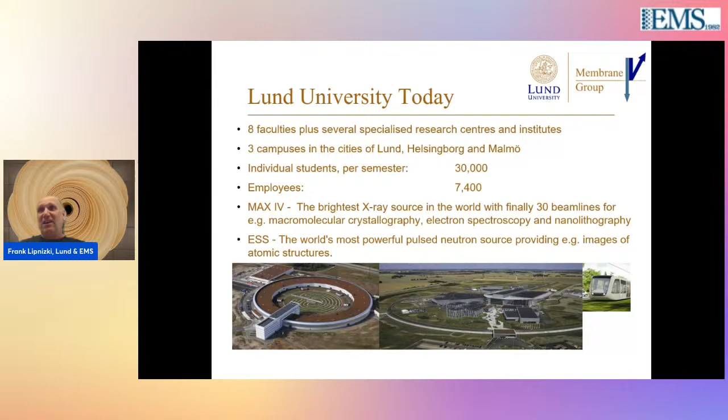One comment on the little picture in the right-hand corner: to connect these two research facilities with the center of Lund, we even got a tram line. We're probably one of the few small cities with a nice tram line running from the main train station to these research facilities through the university.

That gives us unique opportunities. We have something like 20 pilot units available for different types of membrane processes, from pressure-driven membrane processes to more advanced ones like electrodialysis, forward osmosis, and membrane distillation.

The nice thing is we are the leading membrane group here in Sweden, and the history of membranes at Lund University is over 50 years old, so it's a very established group. We do both fundamental and applied research, but our focus is really application development.

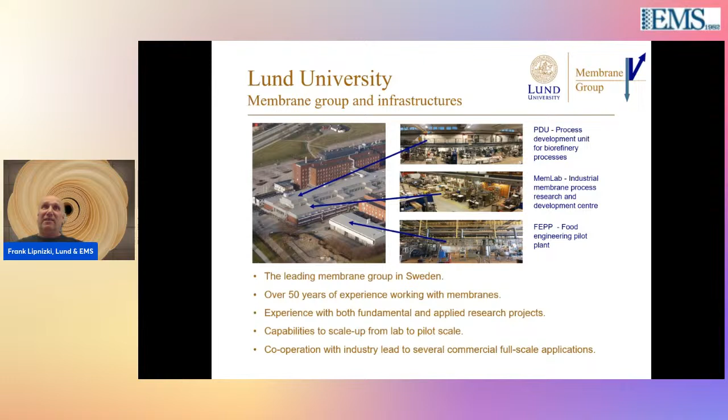We have the capability to move from lab scale to pilot scale. Most of my projects are directly related to industry, where we try to help industry validate process ideas and scale them up, hopefully ending in a full scale installation.

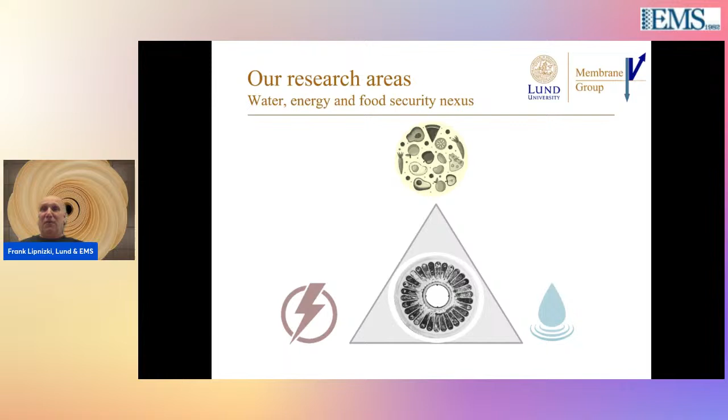To give a quick overview of my research areas, it's the water, energy, food security nexus. As you can see, in the middle there's a membrane, and the membrane is dirty. That means in all areas, membranes by nature get dirty like children, and therefore fouling and cleaning are important parameters to understand when working with membranes.

Just to give you a very brief overview of some of the applications we are working on. In the food industry, we are working a lot nowadays with vegetable proteins from underutilized byproducts, such as proteins coming from rapeseed production, hemp production, and soya milk production.

In dairy applications, we are working with byproducts. For example, we sample whey and try to utilize it even better. But also the sterile filtration of milk is an important area.

When it comes to energy, we work a lot with biorefineries, specifically here in Scandinavia, in Sweden. We have a large pulp and paper industry, and we work together with this industry. But we also look at blue energy with membrane processes, like reverse electrodialysis. And one of the areas where we started now is actually battery recycling, because we will have more and more electric cars, hopefully. And in the end, the batteries from the cars have to be recycled, and membranes can actually play an important role there.

When it comes to water, water and wastewater treatment with membranes is important. In Sweden, we have more and more installations of membrane bioreactors for wastewater treatment, but also large installations for producing drinking water, for example from surface water or groundwater. One of the areas where we are working a lot, and I'll talk about this a little bit more, is stormwater harvesting with membranes.

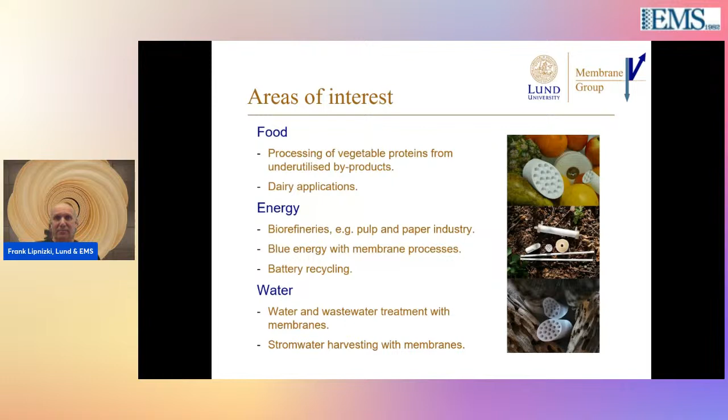This stormwater harvesting with membranes is related to the REWAISE project, a Horizon 2020 project coordinated by Aqualia in Spain. It's a huge project. We are 30 partners in 11 countries, running until 2026, with a budget of 80 million euros.

Here in Sweden, our focus is basically on three areas: rainwater harvesting and reuse, nutrient retention, and digital twin measurement of water balance. The very nice thing is we have three areas in new parts of the town of Malmö in Sweden, where we try to integrate and implement these new technologies. By showing politicians, businesses, and society that this works, we hope to have an influence on policy making, business development, and social engagement.

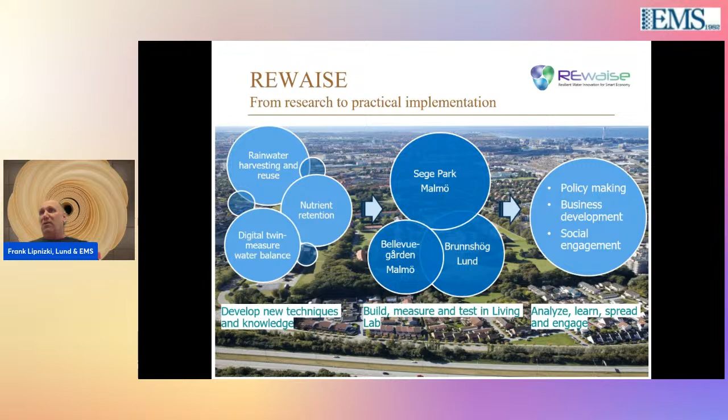So what is actually the secret behind everything? When you look at drinking water consumption in liters per person a day here in Sweden, you can see very nicely that a lot of drinking water is used for things where you might not essentially need drinking water, in particular toilet flushing and washing.

This could be two areas where you could utilize maybe good water quality, but not drinking water quality. And that was one of the ideas behind our project: can we utilize rainwater and upgrade it sufficiently that we can use it for some drinking water applications without actually producing drinking water itself?

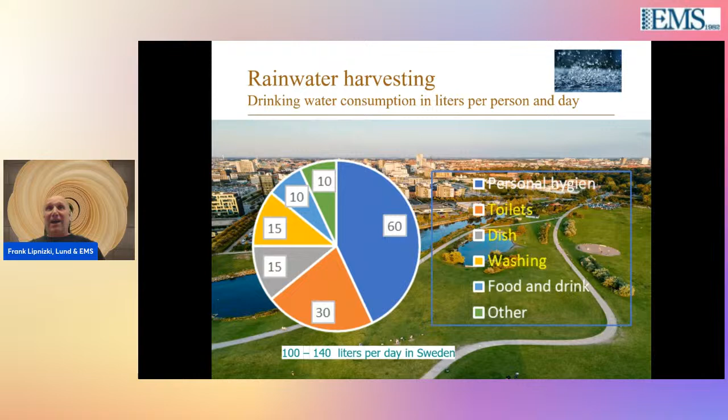The concept we came up with was to collect rain and storm water and then reuse it. One of the challenges was that rainwater and storm water can contain, for example, microplastics and micropollutants, and that's certainly something we don't want to utilize. So we really looked at opportunities: how can we do this better? And one of the solutions we came up with was membrane technology.

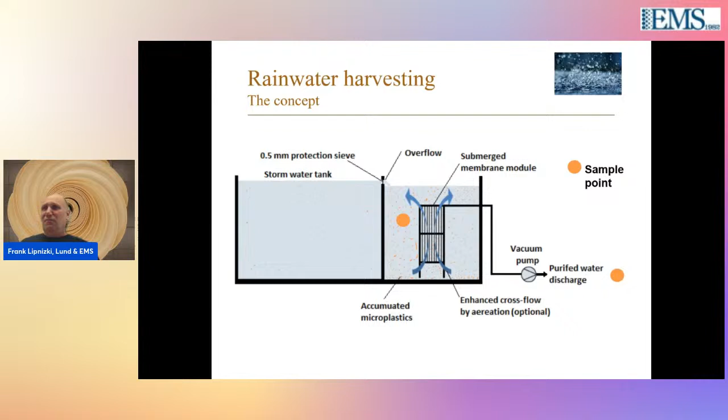That's actually the initial concept we came up with. We have the stormwater tank, with some submerged membrane modules in the tank. We have a bit of aeration to create a cross flow over the membranes, and basically a vacuum pump which takes out the purified water. That was the first sketch we drew, and we thought, that works well. We applied for the REWAISE project, and very luckily, we got the money.

And we thought it would be brilliant if we could have a nice pilot there and run it. We were very lucky because the company LiqTech, a ceramic supplier from Denmark, had a container which they were willing to lend to us. So basically we got a pilot container very fast to Lund and placed it next to this stormwater pond.

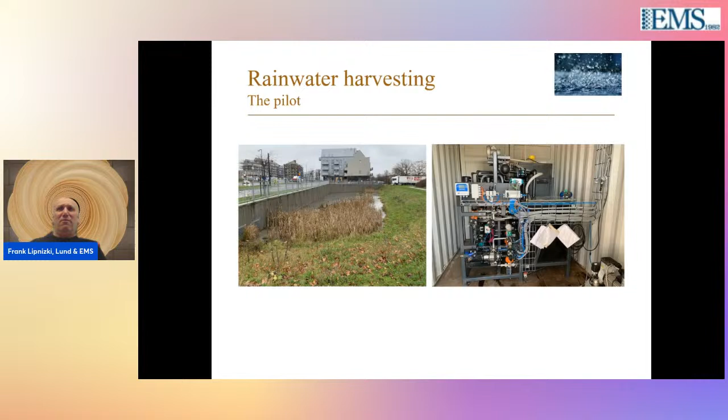We did not do too many lab scale experiments. We really jumped into the cold water and tried whether this works on pilot scale. And that shows we were very confident that our idea could actually work. And we got the first results.

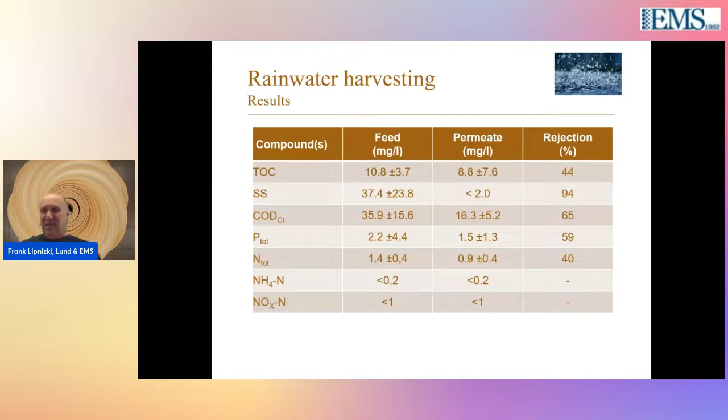And what you can see, we were quite happy about them. Total organic carbon was rejected by 44%, suspended solids by 94%, COD, phosphor, nitrogen - they were nicely rejected. So it was very nice to see what we could achieve with membranes. The membranes we used were microfiltration and ultrafiltration membranes of ceramic nature.

Interesting was also when we analyzed the permeate, we found out that we removed a lot of heavy metals. That was quite surprising because normally you would not expect microfiltration or ultrafiltration to do a great job on heavy metals. But it seems that most of the heavy metals present were actually associated to some larger compound. So we could nicely take them out and produce relatively pure water.

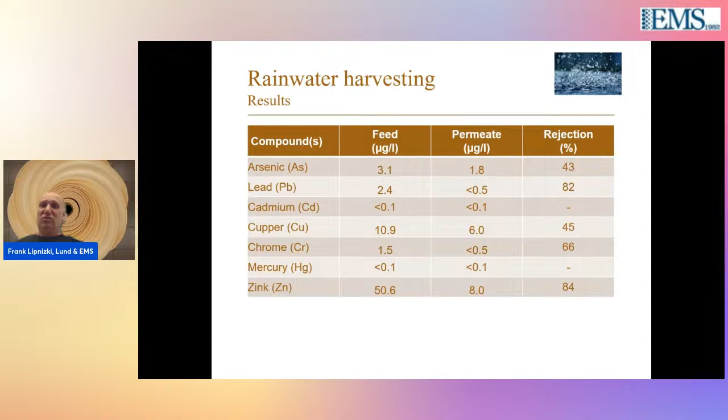We looked also at the bacteria, and we achieved nearly a 2-log bacteria reduction for different types of bacteria. And we were quite happy about this.

There was room for improvement because one of the things we found out during the experiment was that one of our membrane sections was slightly damaged. So the result could have been better if we had had a perfect membrane section. But still, we were quite happy about this result.

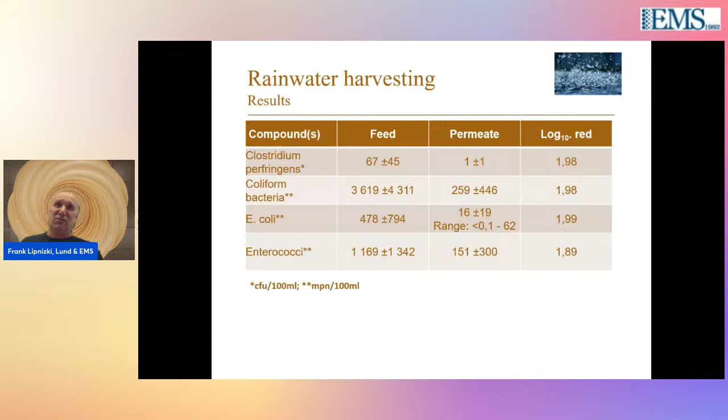This is actually the picture which speaks for itself. You see on the right-hand side the water which goes inside the unit. And when you took out the permeate, it was crystal clear water. That was a very nice thing to show to people when they came to our test container - take a sample from the lake, take a sample after the membrane, and show it to them. Then people believe what they see. So that was really quite a convincing argument that it works.

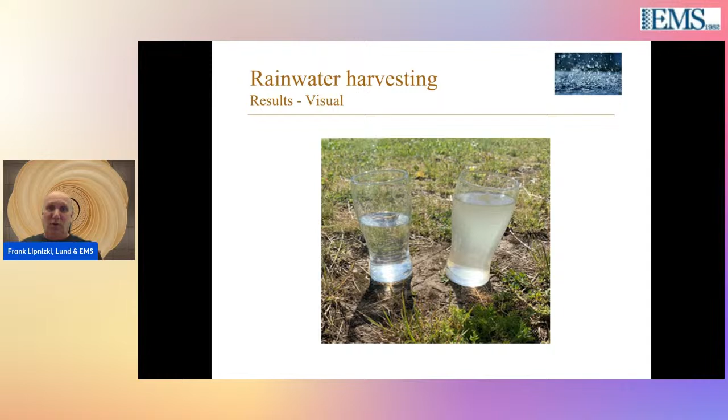Based on this very positive result, we had the opportunity to move further on. In the nearby city of Malmö, there's a new area called Sege Park, where they renovate some old houses to upgrade them to flat apartment buildings. And we had the opportunity to install our technology there.

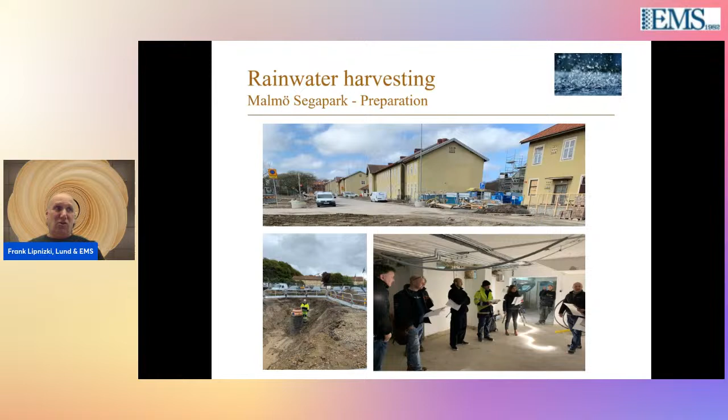What you see at the bottom left-hand picture is basically the outlet from the stormwater tank. We installed some large stormwater tanks there so we can collect sufficient stormwater for one house. And we were allowed to install a membrane plant in one of their houses called Röda Oasen. We were very happy about this.

This is basically how the installation looked like. It's a collective house - there are 44 people living there. We installed this membrane unit there. We collected the rainwater, and when it came towards the unit it was not so nice to look at, it was slightly brownish. Then we had our membrane unit, and a permeate tank - and in the permeate tank we had crystal clear water.

The installed capacity officially is 1,000 liters per hour. But when you look at the unit itself, it consists of 2 tanks. We can actually run up to 2,000 liters per hour if we want to. This was our first plant, and when you do your first plant, you do it in a safe way.

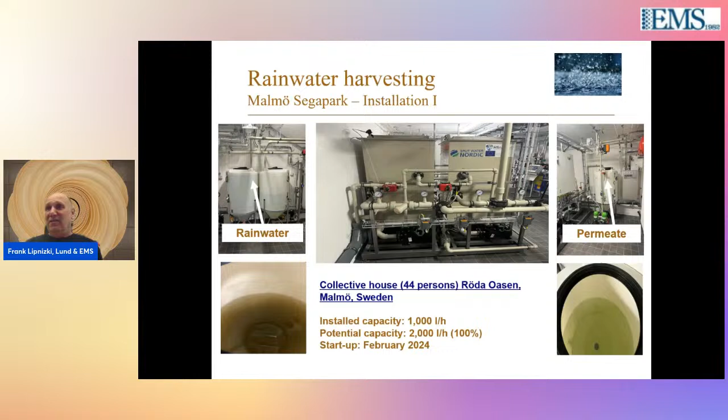Also interesting, we started up in February 2024, and since then the plant is running without any major problems. The biggest problem we had was in the beginning - someone decided twice to stop the plant by switching off the electricity. We had to go there, switch it on again, and the plant was running again. But this was basically the only major hiccup we had with the plant. It was really well designed and very well installed. My colleague Tobias Hay did an excellent job.

Just one more detail about this installation. We have a membrane area of about 14 square meters of ceramic membranes. We produce actually 1,300 liters of water per day, and that's sufficient to flush 14 toilets and 4 washing machines.

The stormwater we are collecting is actually from the roof of the houses, but also from the surrounding area. And one important thing, and that was actually a challenge, and it's still a challenge, is the installation has been approved by the local authorities, including a control plan for the water quality.

So we're testing the water quality on a very regular basis, monitoring it, and we hope to publish it soon. It shows that the membrane plant is delivering a very consistent water quality. And we can replace about 40% of the drinking water consumption of this house, which is close to 500,000 liters per year, which we saved.

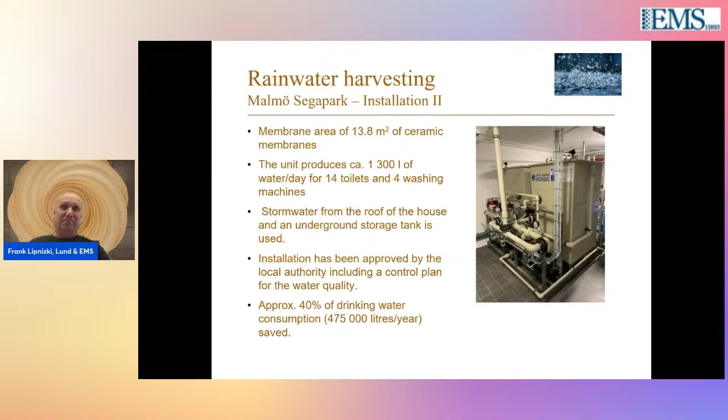Based on this enthusiastic approach, we actually got another opportunity closer to home. Basically, we got the opportunity to collect rainwater from our pilot hall. From this hall, we were allowed to take some of the rainwater, and we wanted to flush some toilets basically in our building, because we wanted to see how it works in our environment.

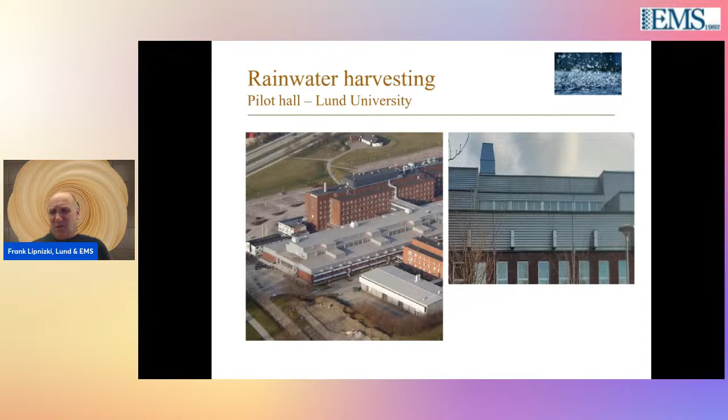And also, it's nice to see it yourself. You can check the toilets and the membrane plant performance on a much more regular basis when you have it so close by. So what we installed here was a pipe which goes from 1 to 2.

From the roof into a collection tank, of which we have 2. So we have 2 collection tanks. Then we have a permeate tank, a membrane tank, where we have the submerged membranes installed. And then we have a permeate collection tank. Afterwards we have a pump, which brings the water to 2 toilets and a washing machine.

Interesting to note is that the whole concept, apart from the final pump which brings water up to the toilets, everything is working on hydrostatic pressure. So basically it does not need any energy. And also pump number 6 is only working when someone is using a washing machine or flushing the toilet. Otherwise, the pump is standing idle. So it's an interesting concept, and it's very energy efficient.

And we started this now in March 2024. So it's now running for nearly 1 year. And it's also running without any problems whatsoever. That's a quite nice indication that this technology is very robust.

Some more pictures: what you can clearly see is the black pipe going into the reservoir tanks. Then you see the tank with the membrane unit submerged with ceramic membranes. And then you see the crystal clear water being used in a toilet. The toilet has this nice logo attached to it.

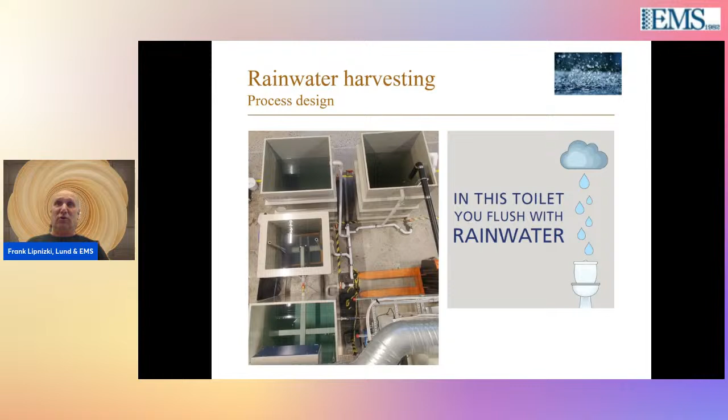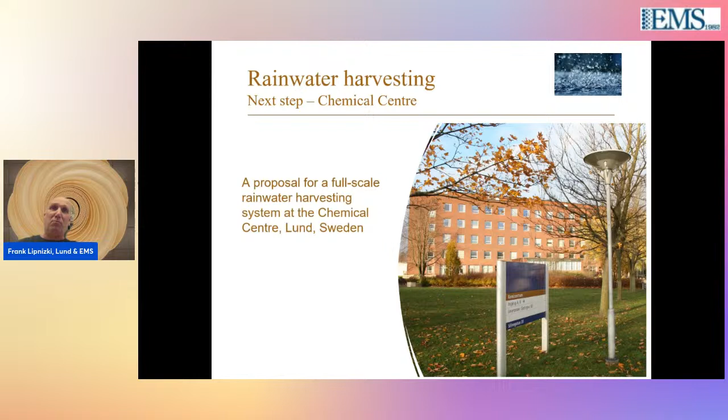Based on this, our university was very excited, and also the people in charge of the building thought, why can't we utilize this technology for the whole chemical center? So we were asked to make a proposal for a full-scale rainwater harvesting system for the center.

And there was a certain demand. We have here in the center 173 toilets, 3 washing machines, 1,000 workers and students per day, and 200 working days per year. So that's basically our academic year.

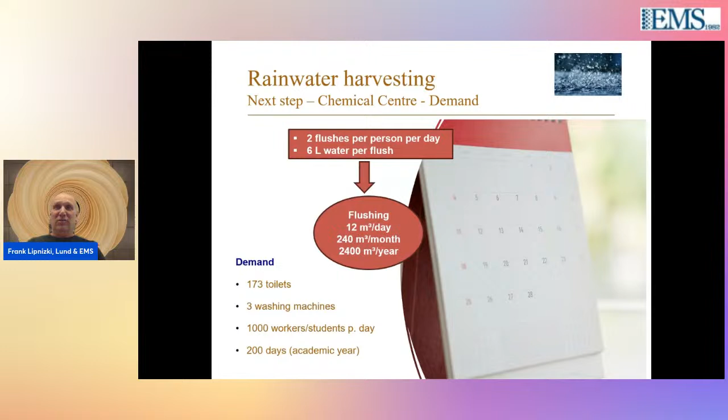When we looked at the consumption: 2 flushes per person per day, 6 liters per flush, that gives us basically 12 cubic meters per day, or 240 cubic meters per month. We also looked at the washing machine, and we say 1 wash per day. A wash takes about 83 liters. That means for our 3 washing machines, we need a quarter of a cubic meter per day, or 5 cubic meters per month.

Together this gives us, we need to produce something like 13 cubic meters per day, or 260 cubic meters per month.

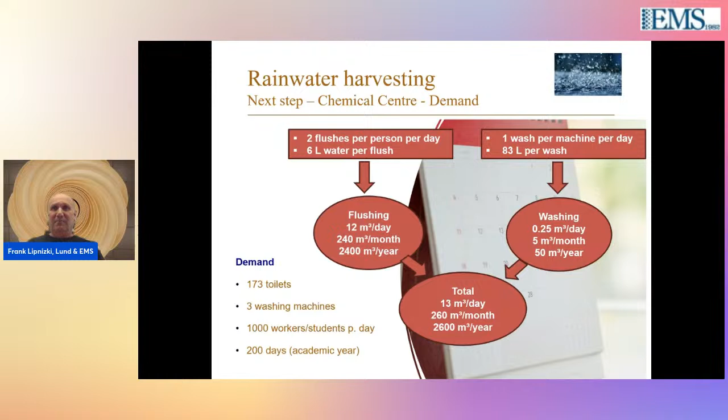We looked at the rain available, and the average precipitation here in Lund is actually 64 millimeters per month, and 1 millimeter of rain equals basically 1 liter per square meter. We looked also at runoff coefficients with regard to asphalt and to the roof. Here you see basically the precipitation in Lund. It was an eye-opener for me to look at this, because I was always surprised. My birthday is at the end of April, and basically April is one of the months with the lowest rainfall in Lund. So this demystifies my observation that I always have sunshine on my birthday, but that actually helped us design the tanks and also design the membrane unit.

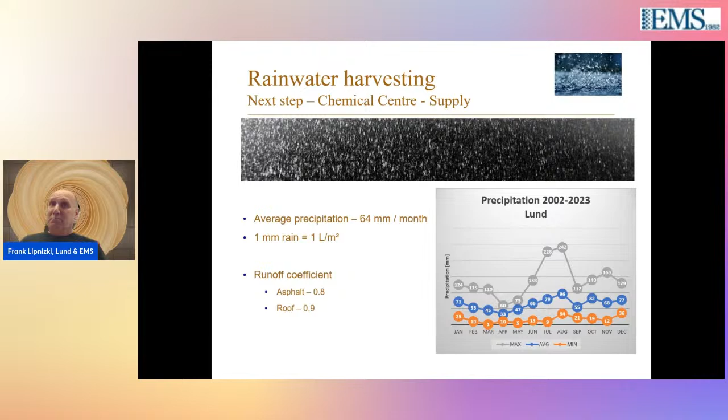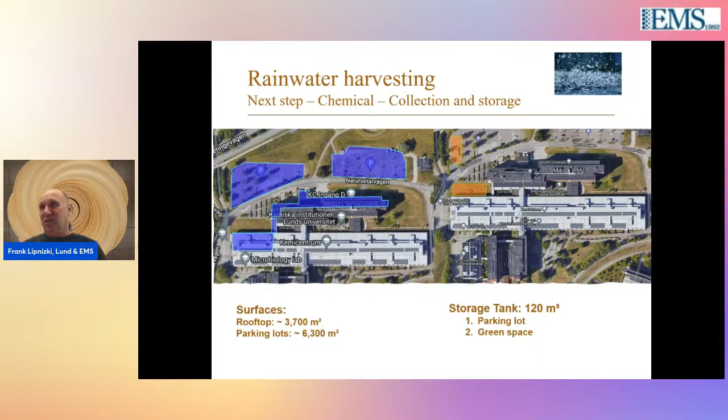What we looked at is how much area we have to consider for collecting the rainwater, and how much storage tank we need to ensure we have 365 days of water for the toilets and washing machine in the center. When we took some of the roofs and also the parking lots, we had sufficient area to collect the rainwater, and we suggested installing two storage tanks, a total of 120 cubic meters in size, underneath the parking lot and underneath a green space. That would be sufficient to ensure that we can utilize the system day in, day out.

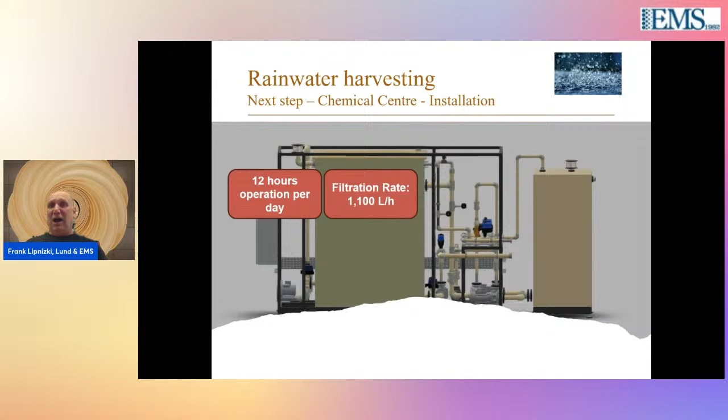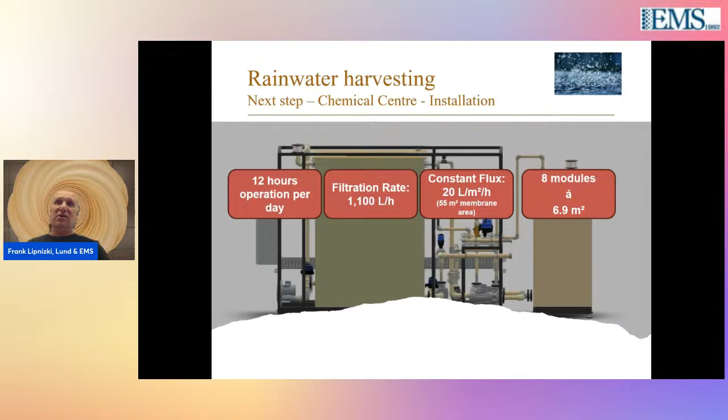This is basically how the system would look like. We would have 12 hours of operation per day. The filtration rate would be a little bit more than 1 cubic meter per hour, and we would operate at a constant flux of 20 liters per square meter per hour. That means we need a membrane area of 55 square meters, and we would use 8 modules of about 7 square meters per module. So it's actually quite a compact, easy plant.

Based on the success we've had so far, we also founded a company now, Celestine Water Tech, and that company is trying to promote this technology further, because that's also part of the Rewise project. We should take an idea, test it, develop it, and bring it then to the market. That's basically what we are trying to do.

Especially here in the area, we have a lot of interest from the towns, who think it could be a great idea to utilize this technology for schools. Others in other areas - we are going to build here in Lund a new stable for horses, and there we see a big potential, because the local water companies already indicated that the water consumption for these stables is extremely high. So one should consider alternatives to get water for the horses, and that technology could be something. We are quite happy, and we are working hard to get this up and running and make it available for everyone.

Some benefits and potential: what I want to show is reduction. We can reduce drinking water consumption by replacing drinking water with stormwater in applications where you don't essentially need drinking water. And that's a reduction of pressure on the stormwater networks due to local shortage, storage and consumption, which is also quite important nowadays because we have quite often very heavy rainfalls over a very short period of time, and these stormwater tanks have to be installed. So why not, when you have to install these tanks, utilize them for rainwater harvesting, utilizing them as storage tanks for rainwater?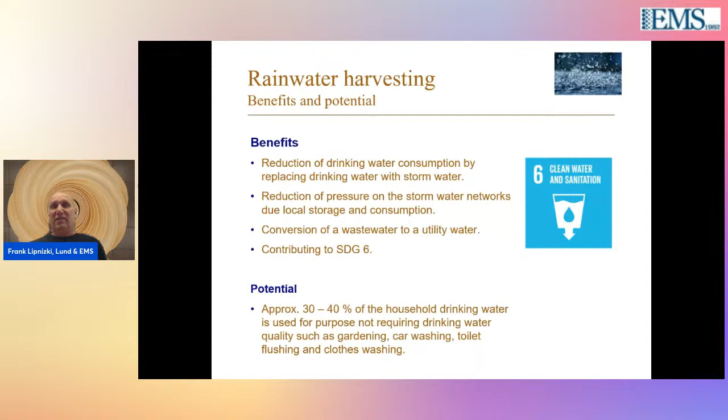What we really want to do is the conversion of wastewater, because normally rainwater would be treated as wastewater, into a utility water. We hope to contribute to this sustainability development goal number 6, clean water and sanitation. We see the potential that we can replace, in an average household, the drinking water consumption by 30 to 40%, and basically not use drinking water for gardening, car wash, toilet flushing, and clothes washing - use rainwater instead.

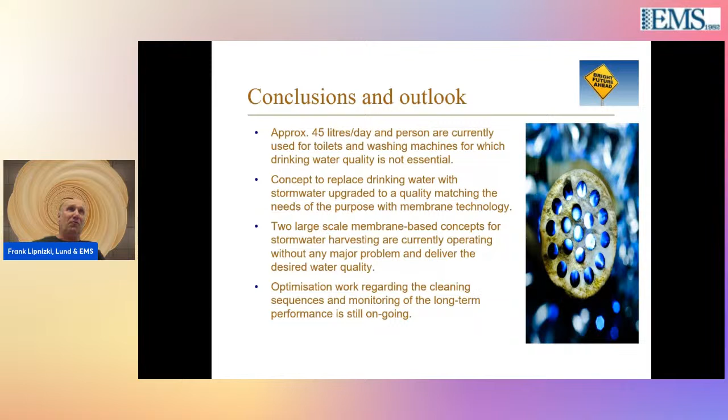So it has a requirement for OPEX and CAPEX, and do we really want to do it if we don't need it? Two large scale membrane concepts for stormwater harvesting, which is currently operating without any major problems, and delivered the desired water quality. One thing we're working on now is improving the cleaning sequences, and we are monitoring the long-term performance of the membranes, as well as the water quality.